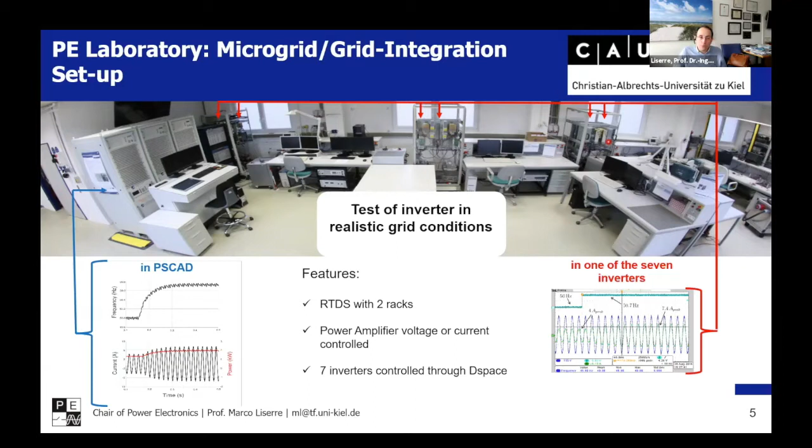Then this is another strong aspect, I'd say reliability, and as automotive field is very important, the aspect of reliability. What does it mean?

So this is a mechanical structure subjected to incredible variation of temperature, and basically you can have some crack, some failure because of this temperature variation. It's very similar to what happens in a building that is under variable temperature - the mechanical structure gets subjected to this stress. In the power module, it happens exactly the same.

Already in Aalborg I was developing a lot in this field, and I'm doing that in Kiel now. We measure with special devices the temperature of the semiconductor and capacitor, and we can see it in operation. We can take, for example, an inverter from electric vehicles connected to a machine - I'll show later a very nice setup we are building that is exactly that case - and you can see the temperature at different points and the kind of expectation in terms of lifetime this system has.

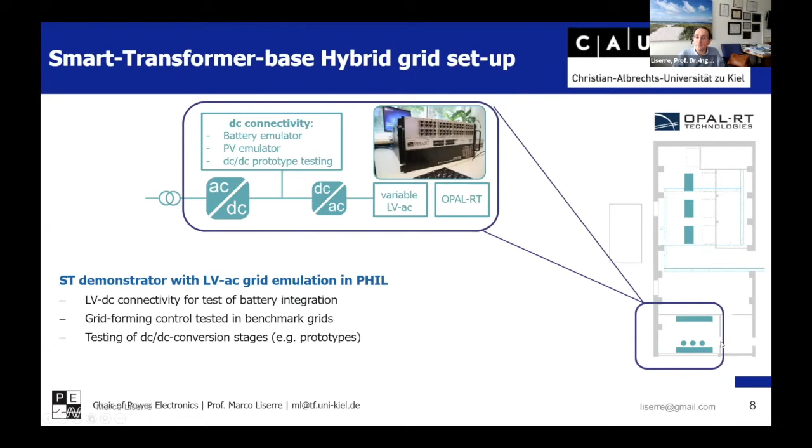This is another part of our building. And nearby there is, and will be connected to this, a brand new laboratory, a medium voltage laboratory, used to test large power converters with high power, medium voltage. And this is a very hot topic when it comes, for example, to charging stations.

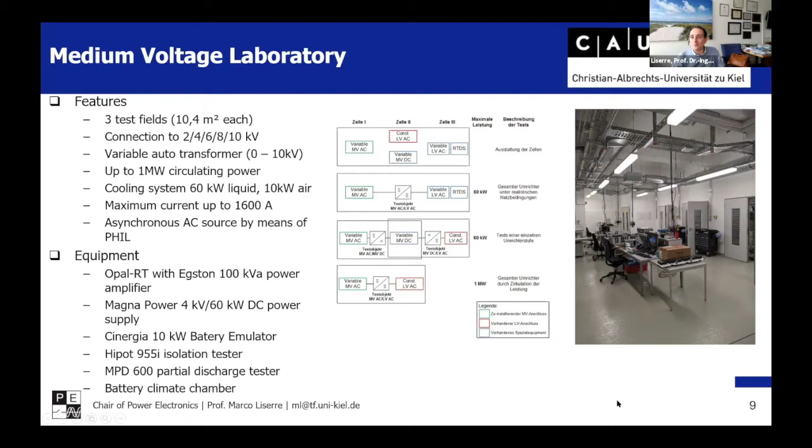So if you want to test a charging station, let's say this Tesla supercharger, you have a megawatt power range, and you need the laboratory to test that, and that's what we have here. It took 5 years to build this laboratory - it was quite complex to get it. Now it's in operation, and not only in operation, we have some prototypes from companies.

So in cell one there's a large modular converter which we connected directly to a 10 kilovolt network, built by some students in cooperation with ABB in a project. In the middle, actually something that has not to do with medium voltage but you have high current - with Danfoss Silicon Power, which in the region is actually producing power modules for semiconductor, and it is actually in the automotive field.

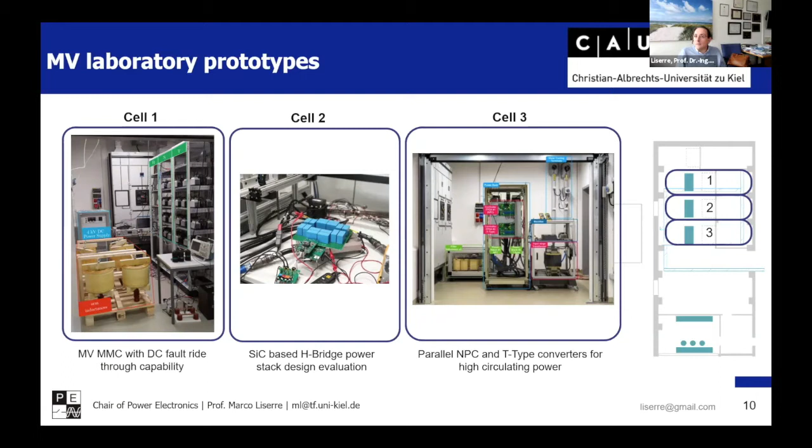And then in the third cell we have a multi-level converter, which circulates something like 500 amperes. So it's quite a large system. All 3 cells are in operation at the moment.

And then we have started this laboratory. We have got funded, and now we are buying equipment and building also competencies there, focusing on batteries for the smart grid and also electromobility.

The nice thing is that we have very good knowledge of battery technology, because here in Kiel we have a very strong Institute of Material Science in the Faculty of Engineering. They are nearby us, we are closely cooperating, and they know very well about the chemical properties and the material properties. So we will focus on this.

For teaching, I think you have all the information already, also from the first presentation which Professor Moira made—we have summer and winter terms. In summer, some of you will already come. It's the design of power electronic converters, mostly power converter topology and modulation. In winter, we have modeling and control of power electronics.

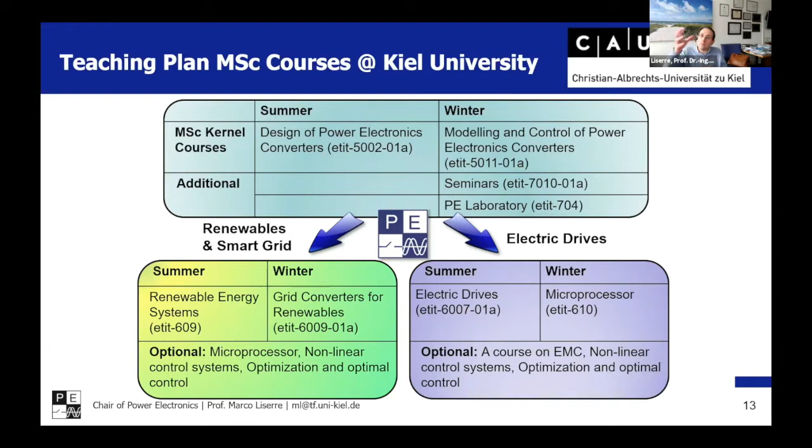And in winter we have grid converters for renewables, mostly power converters connected to the grid, or connected, for example, battery to the grid. So yeah, that's for you.

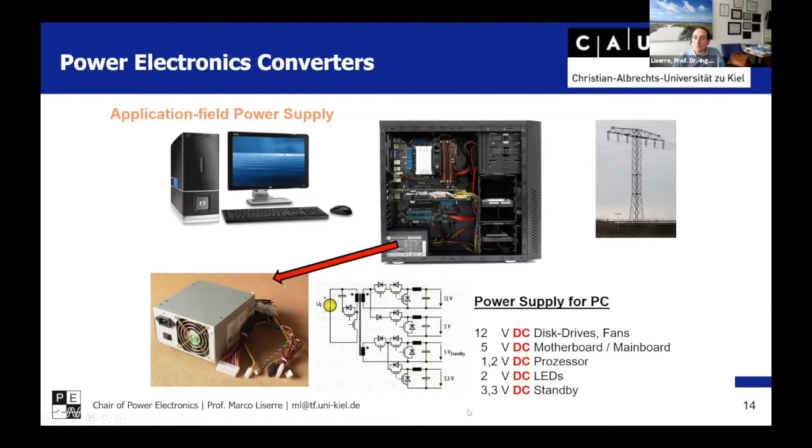So let's look at what power electronics is in general, with the example of a computer which needs a power supply at different voltages, and then you have to connect to the electric grid. Basically, power electronics spans from 1 watt to 1 gigawatt.

So there's also high potential in saving energy when you use power electronics in applications where it's not yet used. Power electronics is spreading into a lot of applications.

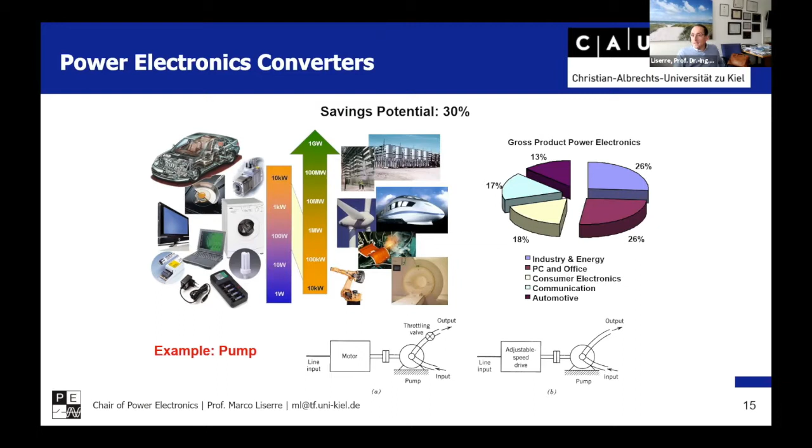In the automotive field, don't think only of the main engine, the electrical machine which allows the car to run, but also think of a lot of other smaller systems which need actuators in terms of electrical machines, and then they have power electronics. The power electronics can increase the controllability and also increase the efficiency compared to using some mechanical systems. That is basically the main motivation.

Another application where we are also present is wind. Of course you have mechanical energy, then a generator, and then power electronics to control the generator and connect to the electric grid.

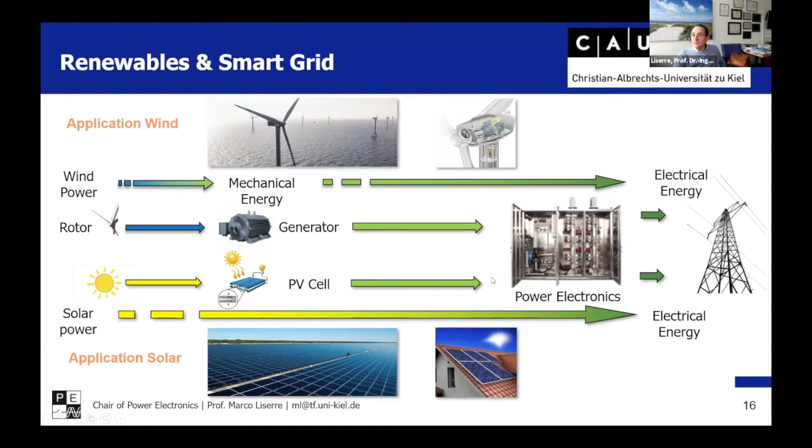And photovoltaics—of course you have DC voltage, and then you need power electronics to connect to the electrical grid. But you can also go, for example, to high voltage DC when you have to transmit a high amount of power. That is basically also part of our scope of interest, because we are very active in power electronics for the electric grid.

We are in strategic programs in Germany, which are very long-term initiatives about that. And of course, e-mobility—not only, as I say, power electronics for the main machine, but also active suspension.

We have done some work also in cooperation with some colleagues in Italy. Wireless power transfer—we also do that, to charge the car, which could be static or dynamic, so when the car is moving.

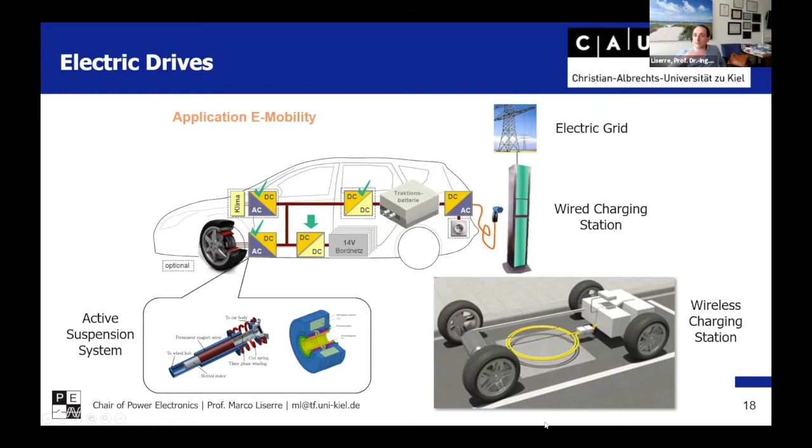Here you can have a look at the projects, to see a bit more in depth what we are doing. These are all the projects that we have in the energy system, in the field of electric vehicles.

Just an example, the KielFlex project is a project of the city of Kiel, where we consider, for example, the mobility of ships, buses, and cars, and then the charging station, the impact on the electric grid, and so on.

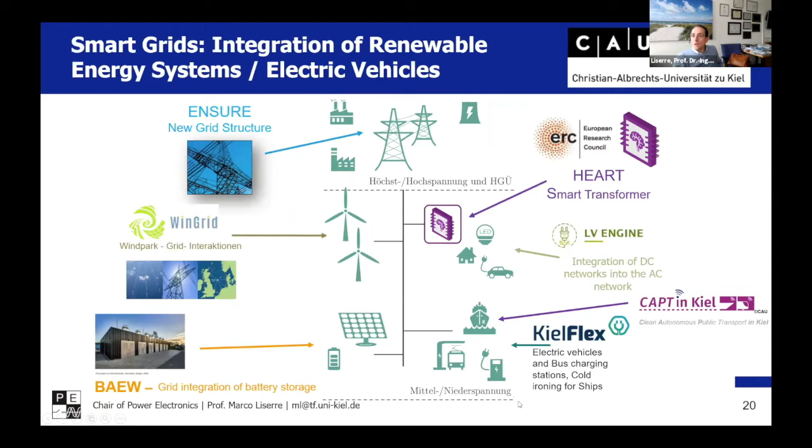We have also a lot of projects specifically focused on electromobility, also with local companies, where we have seen, for example, a nice presentation from the company in Hamburg, Neuville. They make this small trailer, a very revolutionary idea, and we are cooperating with them on the electronics of this small trailer. But also with other companies, local, regional, and also in Germany in general.

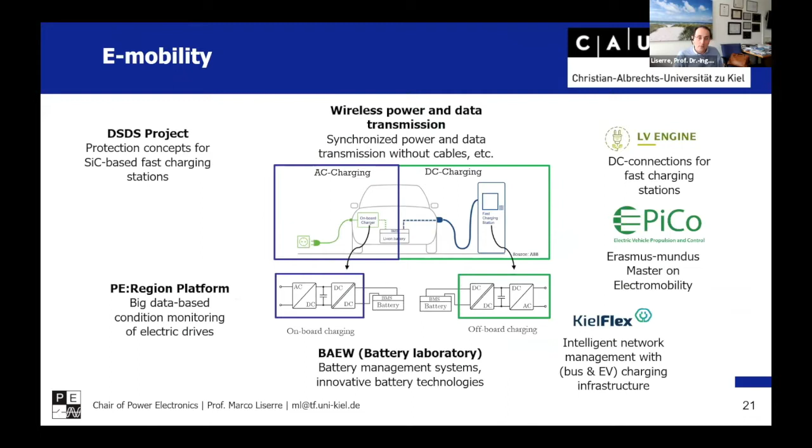That is what I talk about with projects, then we go into some results. For example, I told about hardware in the loop and power hardware in the loop. These approaches test some hardware, some power converter, some control. That was the project I was referring to previously.

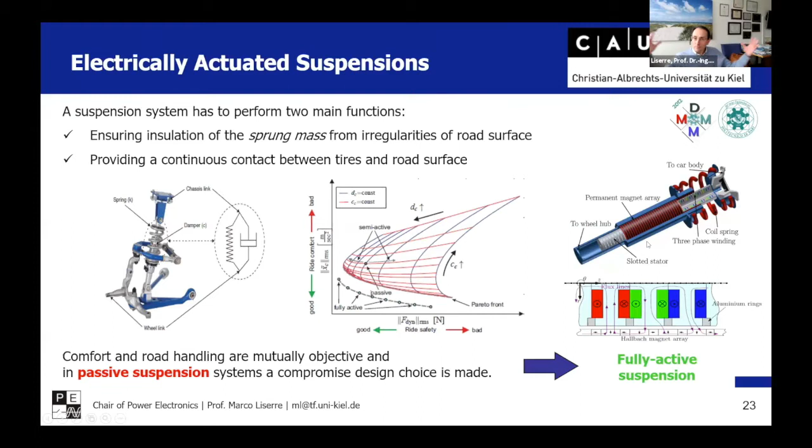We have modeled an active suspension, which is basically used for damping the oscillation and vibration of the machine, and you can also use it to recover some energy. With colleagues from the Department of Mechanical Engineering in Italy, who we are still cooperating with, and other students, we made the full model of the entire chassis of the car.

At the bottom here, you see the road profile and the suspension. The rest of the vehicle is actually simulated in this supercomputer, and then there's a power amplifier which applies some signal to this inverter of Danfoss, controlled by dSPACE, to actually control this active suspension. We are cooperating with dSPACE, which is in Paderborn, not far from here.

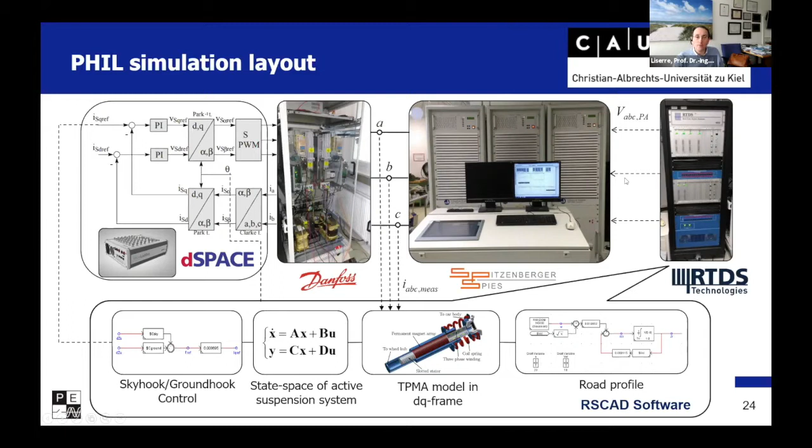We have done a similar study also for testing, for example, a smart transformer, again with part of the network simulated, and the power converter doing the smart transformer in the laboratory.

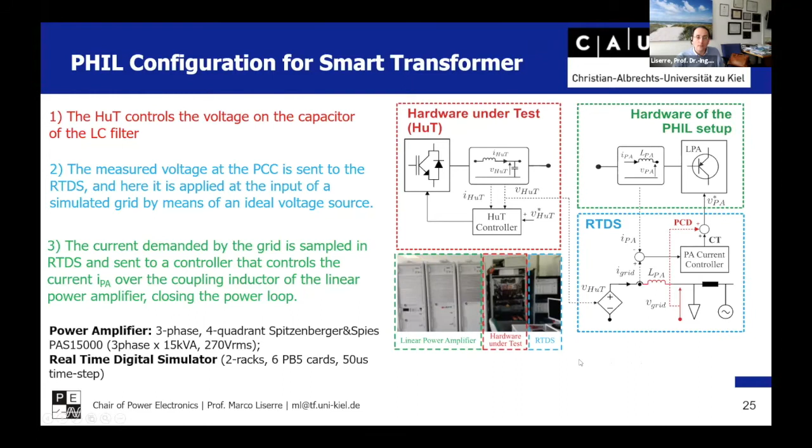Typically when part of the network is overloaded, you have to invest a lot of money to reinforce the line. If you use instead the smart transformer, you can control where the power is flowing. You can save money, and you can also save emissions, because using DC gives you a more efficient technology.

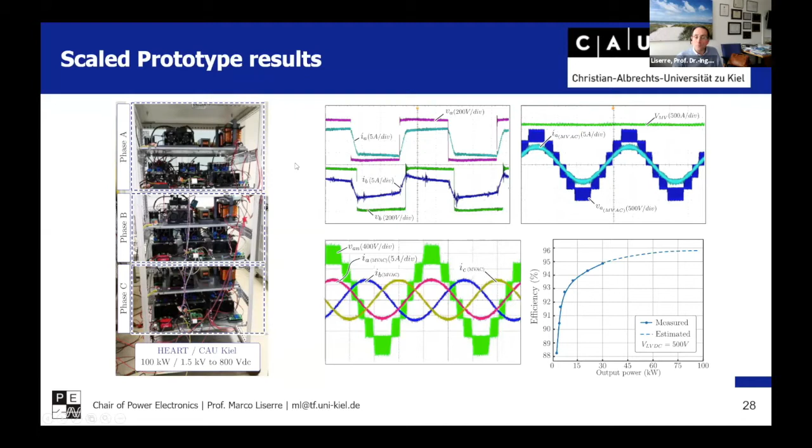We have also focused a lot on reliability, introducing this concept of power routing. You see on this side here, when you have a modular system with different cells managing the power, sometimes one of these cells gets a failure or should be replaced, gets maintenance, and then comes back into operation. At the end you have cells with different lifetimes, and you try to stress each cell differently depending on its strength.

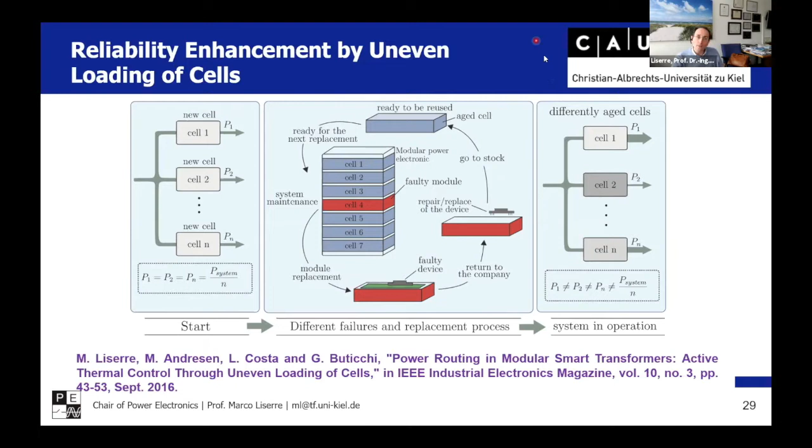If a cell has more remaining lifetime, you stress it more, and those that are a little weaker you stress less. This is the concept shown here with a simple 3-converter cell setup, connected in parallel, where the power balance becomes unbalanced because in some cases you want to increase the lifetime of a component with very low remaining lifetime. Cells 2 and 3, which have more remaining lifetime, can consume more of their lifetime.

These are concepts coming from industry, especially the automotive sector, which is developing control for the lifetime of components. So basically, you are not only controlling current, voltage, or speed of the machine, you are even controlling the lifetime of the components. Very advanced, and this came from industry about 30 years ago.

We also make studies considering the distribution of different cells, for example of a modular structure. In green, you see that if you don't do anything, the cells will fail between 19 and 25 years. Using our approaches, you get what you see in blue, giving a clearer expectation of when the cells are going to fail. You can basically postpone the 5% failure probability and make the window narrower, giving a better expectation of when to do maintenance.

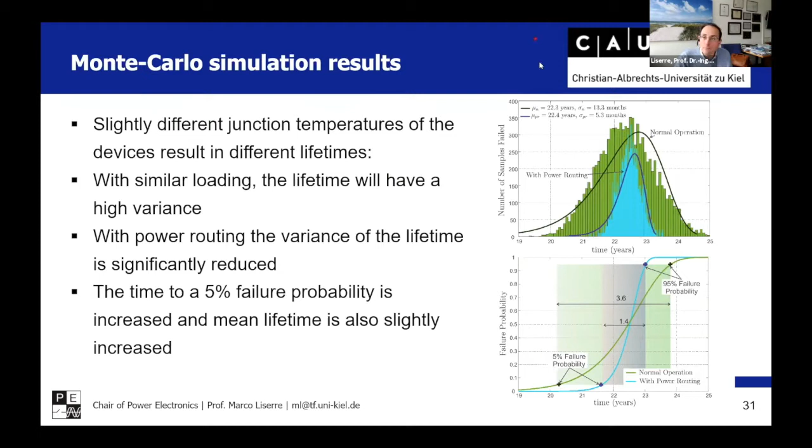This kind of concept is sometimes a bit outside our electrical engineering background, but especially for a multidisciplinary master's program like yours, I think it's something that can be interesting, because these are approaches that actually apply in industry.

Another example, this large system which was built to test impedance in the electric grid. Here there are these two containers - we build the power converter and the control, and then we put into the grid some signal to measure the impedance of the grid. You can do that, for example, also for batteries.

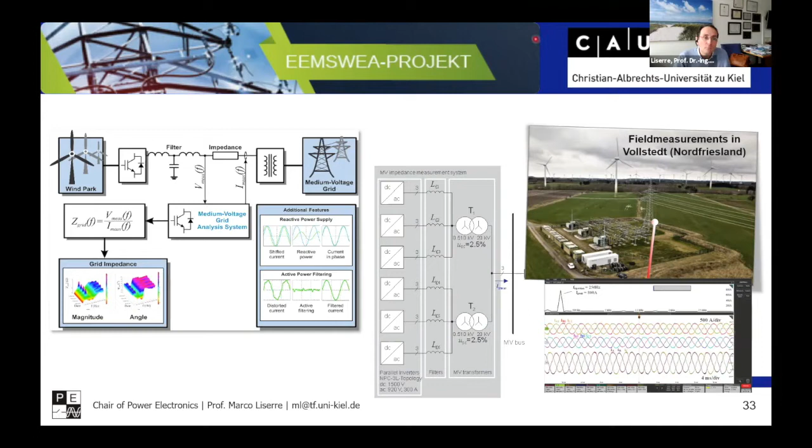In fact, we are also developing the same concept for batteries, or sometimes to characterize part of the powertrain of electric vehicles. We get some requests from companies active in this field. So it was a challenge, not only from the hardware point of view, you see it's quite a large system, but from the control point of view, you see a lot of oscillation, and you try to also dampen it.

Another example is this high-speed drive. High-speed drives are very often now used to also improve efficiency, because you can avoid having the gearbox, and they have a machine which is rotating at high frequency, which should be specially designed for that. For that reason, we are cooperating with this professor from the University of Flensburg, who is designing the high-speed machine for us. You can see here the high-speed machine was specially designed for that.

You see here, and we have used some special power electronics developed in cooperation with Danfoss Power Electronics here in the region, which are using also silicon carbide devices - it's a hybrid ANPC system.

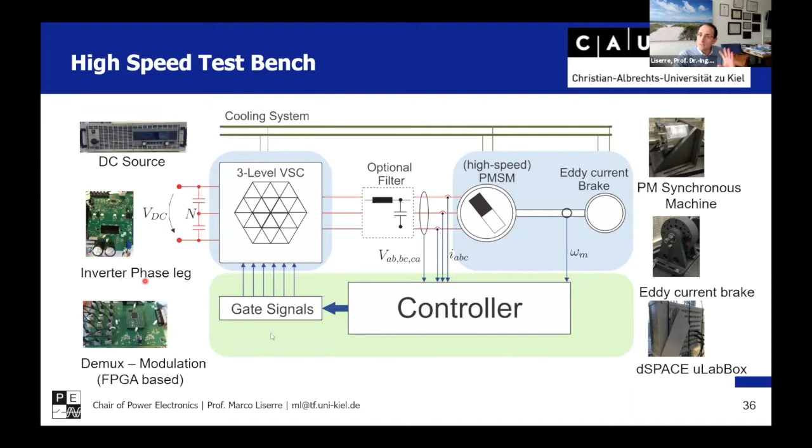You see here, this is the open module. This is something that we can only do because we have the cooperation of the manufacturer of power modules, who actually produce some power modules without the gel. And you see some of the devices, they are basically SiC MOSFETs, some other classical IGBTs.

Then with this module without the gel, we can see the temperature with the infrared camera. So we are going to look very clearly at the temperature into the machine with sensors, into the power module, and then you can do several things. You can optimize the design, you can focus on the control and make the control also take into account the lifetime of the system.

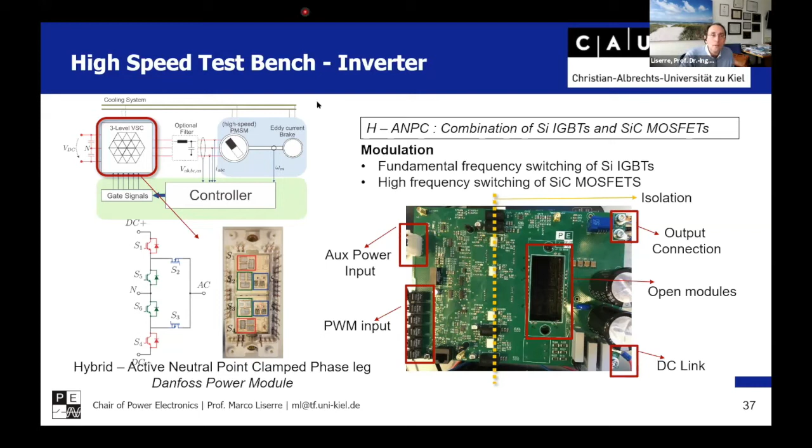So this is also a very nice application in the automotive field. And here you see we also make some estimation of the lifetime, considering different kinds of modulation, for example, ways of driving the devices. So we really have hardware, modeling, control, probability, all coming together. It's very multidisciplinary. For that reason, in the team, we have these three sub-teams with people focusing more on hardware, more on control, and more on application, and they cooperate among them.

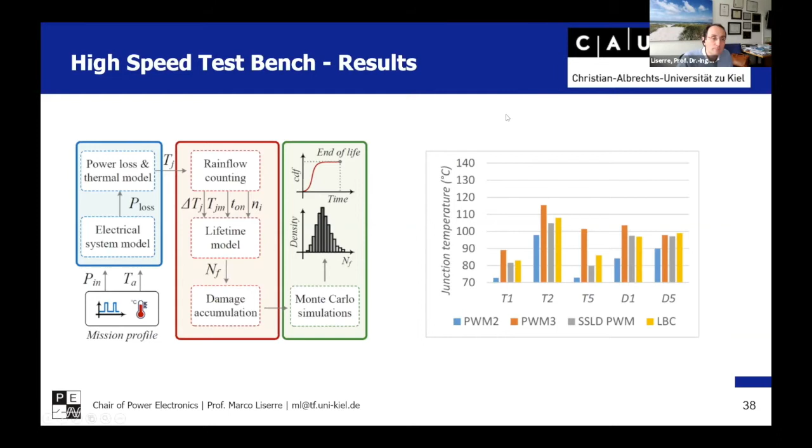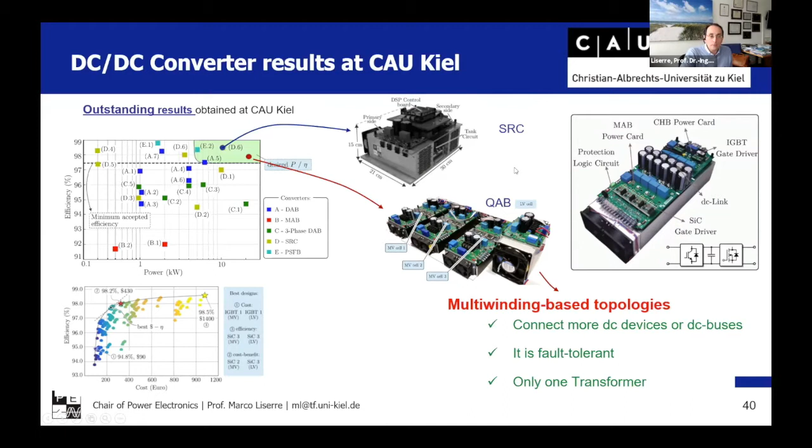This is the DC-DC converter, which was specifically developed to be fault tolerant - also an application in automotive cases. This is shown here in the laboratory under test. For example, we make one cell fail, and then the system continues operating. So basically the system should continue to operate even in case of failure in a lot of applications - electric grid, but also automotive - there is a lot of these requirements.

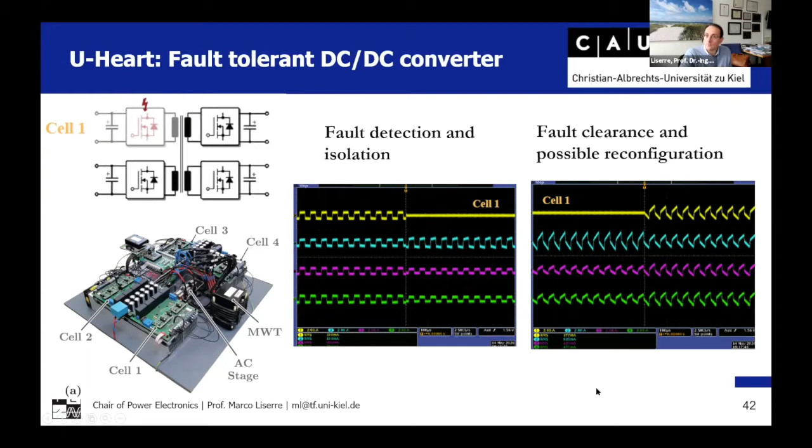And that's it. I would be happy to answer your questions. I think I haven't used maybe a little bit less than half an hour, but I think it's very important to have some interaction among us.

Okay, yes, thank you Marco for this nice talk - very, very interesting in the field of power electronics, and you have really many applications and many collaborations with academic institutions and with companies and industries. So it's very, very important. Professor, I have some questions.

Hi, thank you so much for the presentation. It's so interesting that you have many experiences and many projects in the domain of power electronics, and I'm really proud that I have the chance to work with you next year in my third semester at Kiel University. Actually, it's interesting for me to know more about the platforms, softwares, or applications you mainly use in your laboratories, because you mentioned PSpice and of course MATLAB, and I just want to know about other applications or platforms that you mainly use in your laboratories.

And another thing is my question - we mainly focus on automobiles, but it's interesting for me, what kind of technologies or progress we've had in the domain of airplanes. It's really interesting for me - have you ever worked on a project related to airplanes or not?

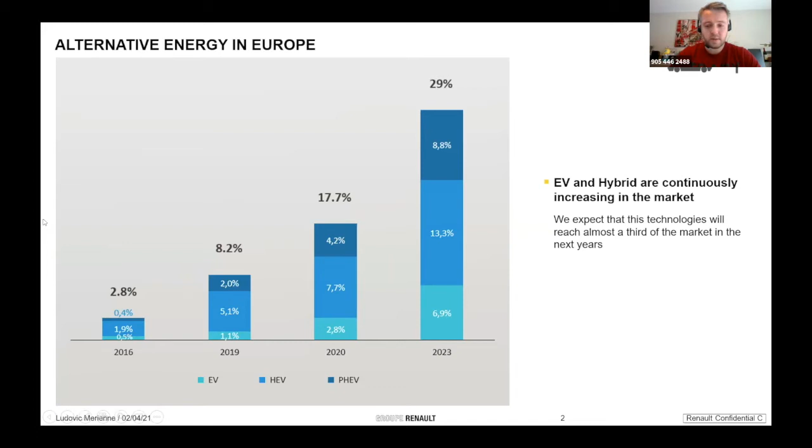We expect that in the next year, maybe 5 or maximum 10 years, diesel will disappear and will be replaced by those technologies. Diesel will only remain for big vehicles, trucks mainly, and not anything else.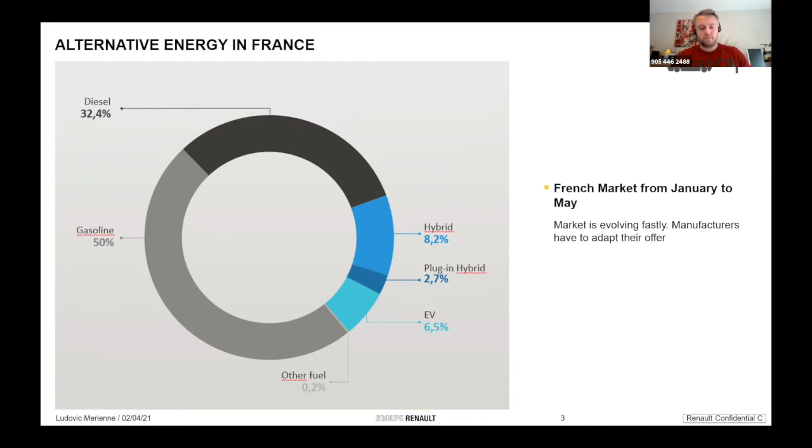So today I will speak mainly about E-Tech technology, which is a new hybrid technology sold by Renault. We started last summer to sell these cars, so it's quite new. I will also touch on some gearbox control issues it faces during this gearbox development, and I will introduce how we manage energy optimization inside the software, so how we reduce consumption in the software, and how we control it.

So to introduce the E-Tech technology, today we sell 3 different cars. Maybe you know Clio, which is a full HEV, so only hybrid, and Captur and Megane, which today we sell as plug-in hybrid. So hybrid for the smallest car and plug-in hybrid for the biggest car. I will explain why it makes sense.

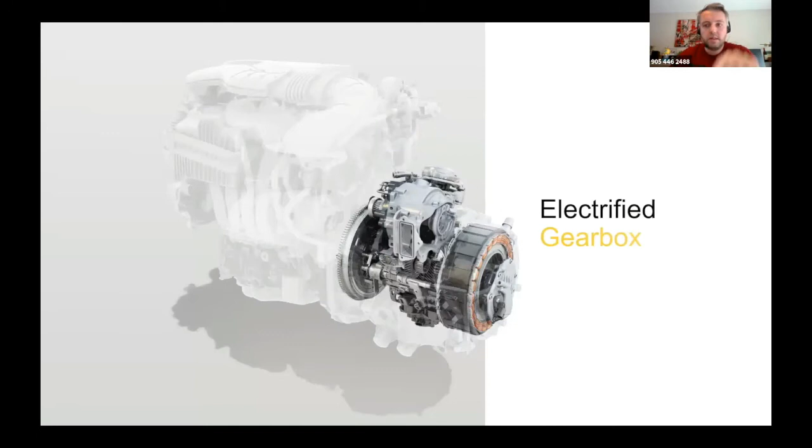So E-Tech is an electrified gearbox inside which we have, as you can see here, a gearbox which is the same technology as Formula One, a gearbox without any clutch and without any speed synchronizer. It is only dog clutch, meaning it's only neutral or on-off gear.

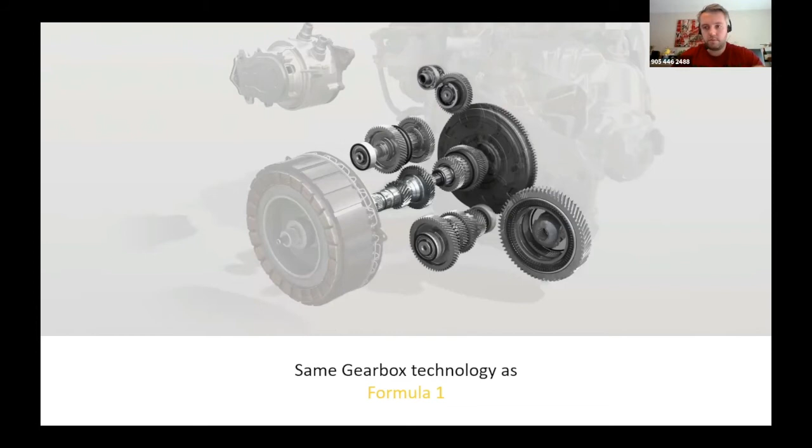It means that if we want to engage, to use some gear, we have to first synchronize speed, so that there is not too big a gap of speed in and out of the gearbox. In this gearbox we have a main e-motor, which is used to start the vehicle. As there isn't any clutch, we cannot start the vehicle with the ICE, the combustion engine. The only way to start the vehicle is with the e-motor, because it's the only motor that can produce torque at 0 speed, 0 RPM.

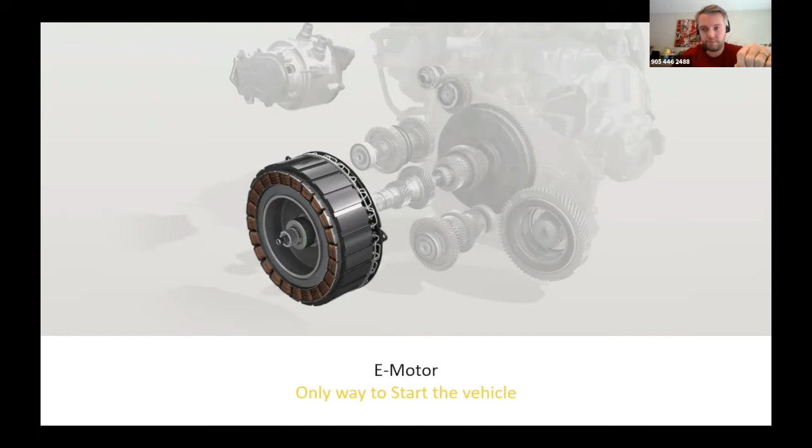And we have a smaller electric motor, which is a high voltage starter generator. If I want to compare the power, the main e-motor is 50 kilowatt power, and the smaller is 25. So it's smaller, but it's still big, as we could drive the vehicle with the small e-motor to maybe 80 kilometers per hour easily. So smaller, but still it's a big e-motor.

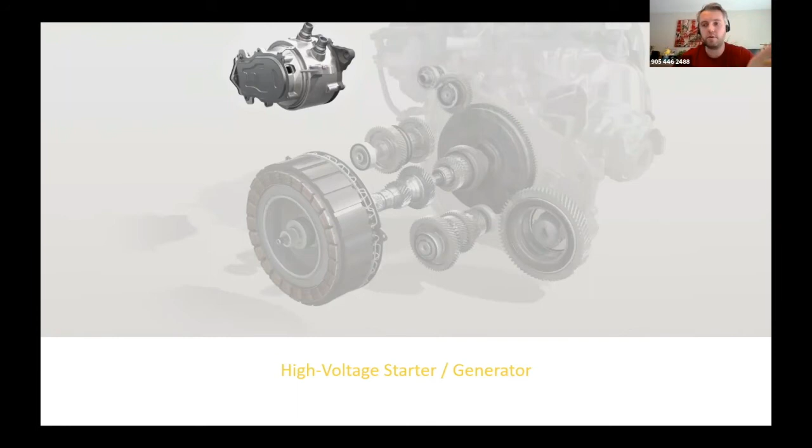And the engine, the combustion engine, is a simple atmospheric and straight-four engine, which has been mainly designed to reduce CO2 emissions, to reduce consumption.

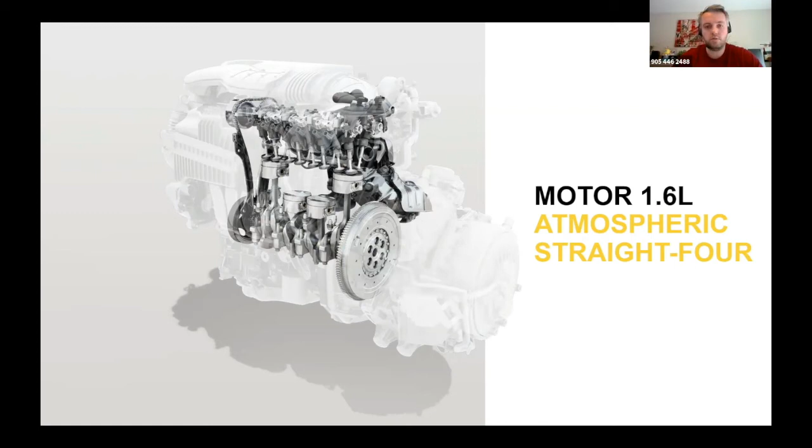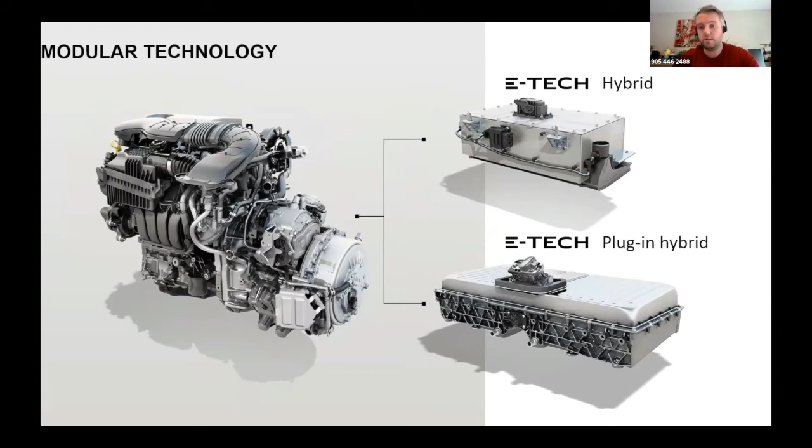And what is interesting with this technology is that for full hybrid or plug-in hybrid, it is exactly the same e-motor, gearbox, and combustion engine. The only difference is the battery, and for plug-in, the fact that there is a charger.

For the full hybrid vehicle, it is a small battery, 1.2 kilowatt hour energy. And I recall about 9.8 kilowatt hour for the PHEV battery. And there are two levels of power, because with the HEV battery the voltage is quite lower. So even if it is the same e-motor, because of the lower voltage, we cannot reach the same power with the e-motor. You understand?

Because the plug-in hybrid battery delivers on average 350 volts, whereas the HEV battery is nearer to 250 volts. So because of this voltage gap, we lose some power, and that's why for HEV, with the complete gearbox, engine, and e-motor, we have 105 kilowatt power, and the same system with the bigger battery can deliver 120 kilowatt.

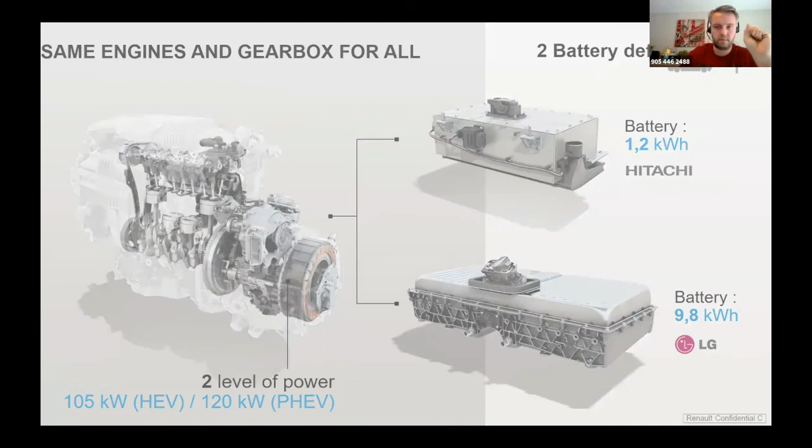So the full hybrid model here, just to show how it is. The battery is located in the back of the car and the motor is in the front. Here on Clio, we homologate at 96 grams of CO2 per kilometer.

To be honest, we had the objective to reach 90 because of government incentives, I think. Yes, you're right. And we will progress in the next year with the same technology. I think we will reach our first objective. So here, yes, it is how it is in the car.

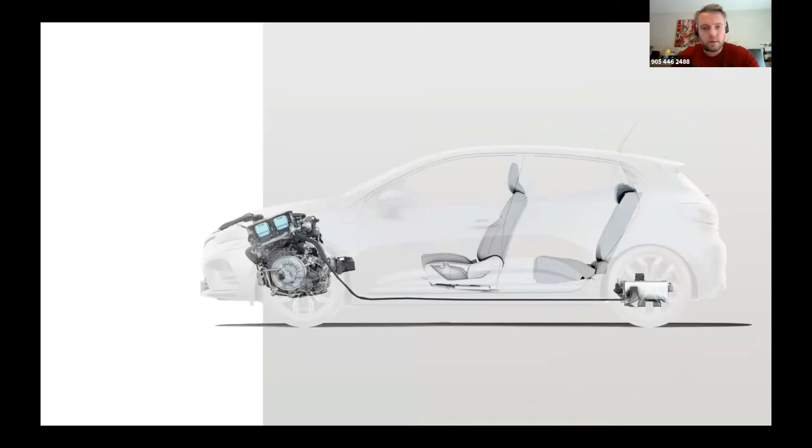And the plug-in version, in the front of the car, it is the same gearbox, same motor. But in the back of the car, the battery is bigger and there is a charger with a trap, an access trap for the charger. So here, the plug-in hybrid will homologate with 32 grams CO2 per kilometer,

which is a number that doesn't mean anything. In fact, it is just a formula we applied to tell this number, because a plug-in hybrid vehicle works in two main modes: EV if the battery is full, or when the battery still has energy, and full hybrid when the battery is almost empty.

So it means that this plug-in hybrid, when the battery is almost empty, the system will work as the HEV version on Clio. The only difference is that the voltage of the battery remains higher, so you still have the 120 kilowatt power, but the emission of CO2 if the battery is empty will be near 102 grams CO2 per kilometer.

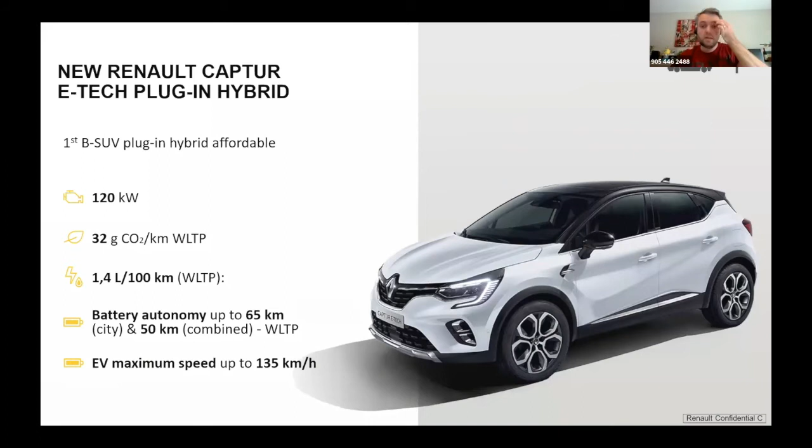Yes. So regarding gearbox, here it is, in fact, mechanically speaking, the gearbox, as I said, which is used in Formula One, is the simplest gearbox we have now. It's only controlled by dog clutch, which means, as I said, that there is only neutral and on-off with any gears.

And here in the gearbox, we have, in fact, 2 gearboxes, one for the ICE line because the high voltage starter generator is always linked to the ICE, so it is one block. And for this block, we have 4 different gears. And for the main e-motor line, we have 2 gears, which means that we can choose independently the gear on the ICE line and the EM line,

which allows us to give a feeling of DCT without any gap of torque when we change a gear, because as it is plotted here, when the vehicle is driven by the ICE and we want to change the gear, we will engage, if it was not already the case, a gear on the EM line, so that when we change a gear, when we have to open the gear on the ICE line, we replace the torque which was given by the ICE by the torque on the EM line.

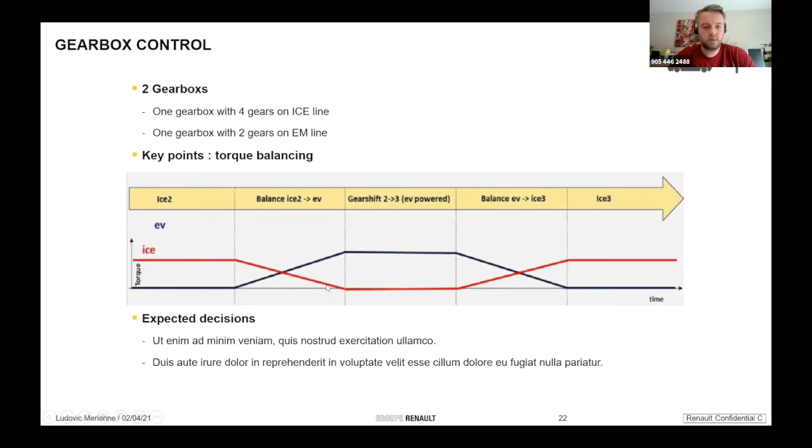I will go more deeply in this case, because as I said, there isn't any clutch in the gearbox. So if we want to start the vehicle, we can only use the main e-motor.

This creates some difficulties because mainly when the battery is very cold, it cannot deliver a lot of power. So it means the minimum speed of the ICE in which we can use it is near 1,200 RPM. It means that we cannot use the ICE gear unless the speed of the vehicle allows us to engage a gear in which the speed of the ICE will be higher than this 1,200 RPM. It means that with how we design the gear, we cannot use ICE gear unless we are above maybe 18 km per hour.

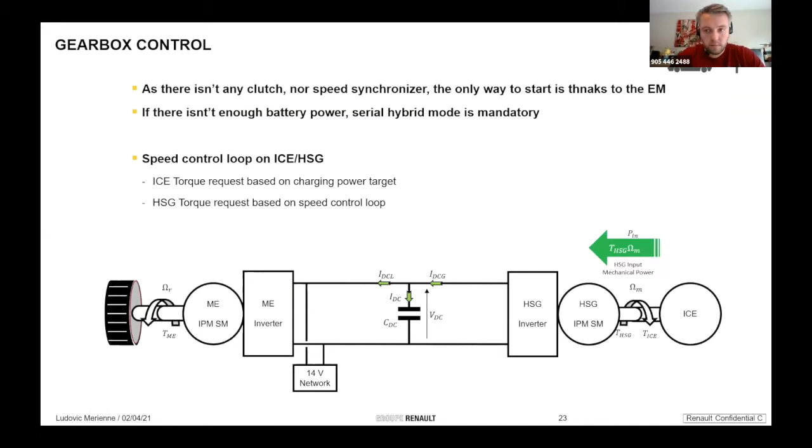So how do we design the control for this? In fact, we have the ICE line, which is standalone, and we have two things to control: the speed of the starter of the high voltage starter generator, which I'll call HSG, the speed of this block, and the electrical power that it will create.

So we choose to control the power that will be created by this block using the torque request on the engine of the ICE. And we choose to make the speed loop using the HSG. Why do we do that? Because the charging loop - as we have a battery, we still have a battery - it is not the loop which needs the more dynamic response.

And our actuator, which is the slower actuator, is the ICE. A combustion engine is really slower than an electrical machine. If I want to give you an example: for a combustion engine, if it is already running, but if you want to change the torque request, it will take at least 200 milliseconds to change and to realize the new torque request we send to it. Whereas the HSG, if we change a torque request, it will only take 10 milliseconds to adjust the torque which is realized. So the electrical part is really fast compared to the combustion part.

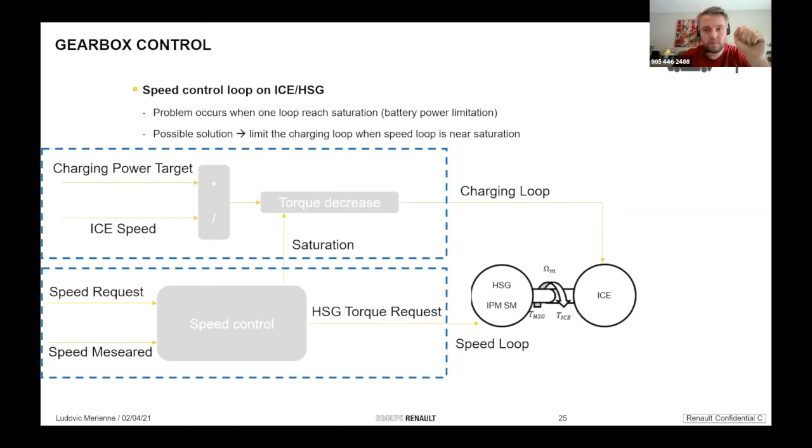So here it is the thesis on which Sébastien Roquet worked in Centrale Nantes. He worked on this problem: how can we manage such a serial hybrid control in the case that we don't have the battery, in the case we only have a small capacitor to only filter the energy. So it creates more constraints, but it is a really interesting topic. I won't detail it because I don't have time, but you can contact Sébastien Roquet at Centrale Nantes if you want more detail.

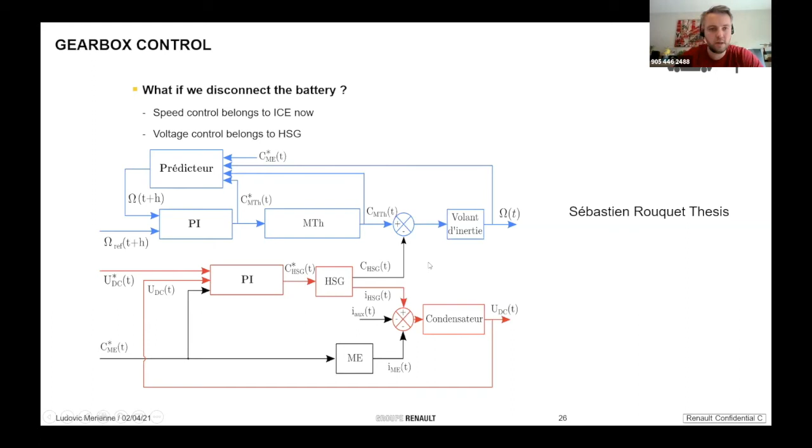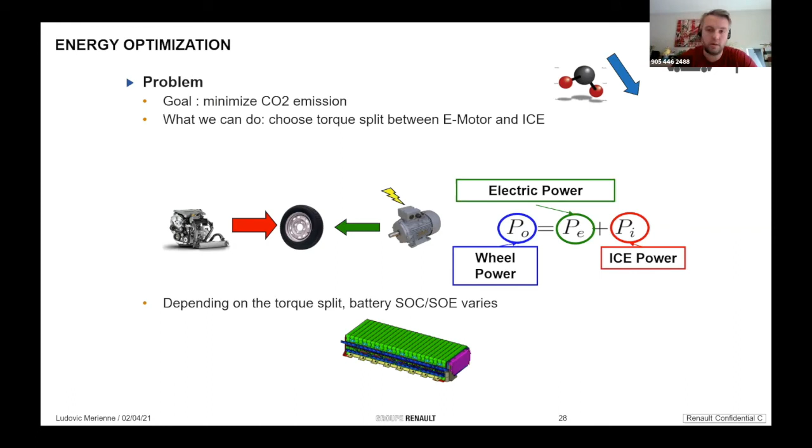At last, I wanted to speak about energy optimization and consumption minimization strategy. So when we are in a hybrid vehicle, our goal is to minimize CO2 emission. As we have an electrical source of power and an ICE source of power, what we can do is choose how we balance the torque between the ICE power and the e-motor. The constraint is that the driver, when he pushes the pedal, we convert this information into a wheel power the driver wants. This P0 is a constraint, and if we realize this P0, we can choose how we split it between the ICE and the EM.

How do we do it? At each time we will calculate what we call an equivalent consumption, using this formula. We use what we call the equivalence factor. This factor converts electrical power into consumption and CO2 emission, so that when we test the different ways to realize the driver wheel power, we can compare which combination of torque on ICE and EM will produce the least emission. This equivalence factor is also used as a way to control the state of charge of the battery.

How is it done? When the battery is fully loaded, this factor will be very low. It means that if the driver wants 50 kilowatts, there are two cases: 50 kilowatts done by ICE or 50 kilowatts done by EM. 50 kilowatts by ICE would have some consumption; if this factor is very low, 50 kilowatts from the battery will be almost free. So when this equivalence factor is low, it means we will drive almost only as an EV. Then when the state of charge of the battery goes too low, this equivalence factor increases, meaning we will use more and more ICE power, and if this factor is very big it will lead to using even more ICE power than the driver asked, just to charge the battery.

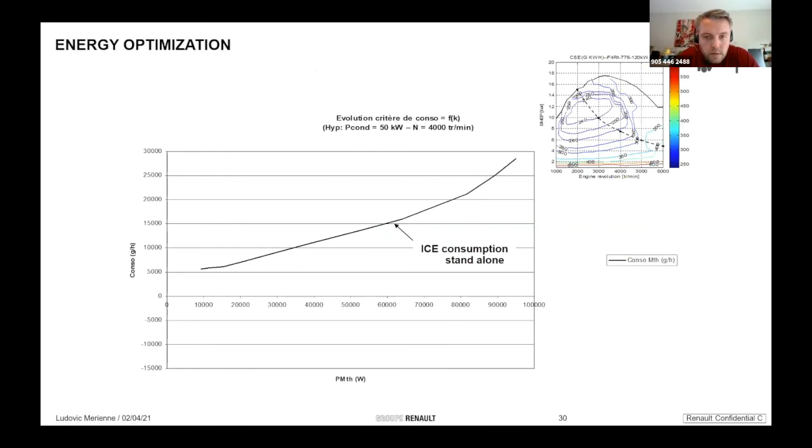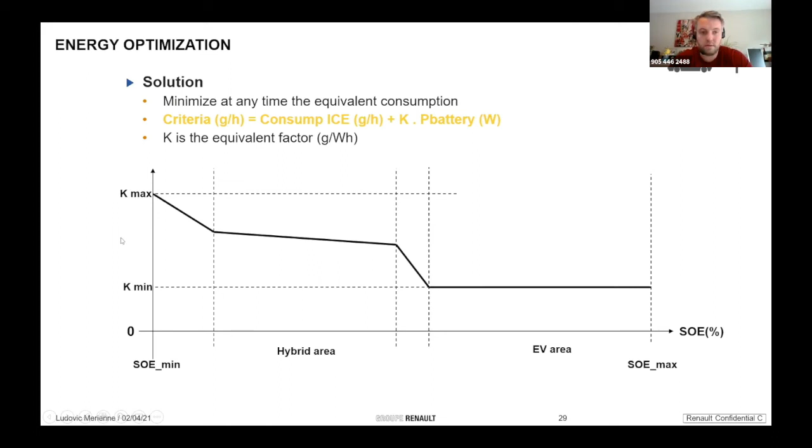As shown here, on the left part of the graph it is the hybrid area, and on the right part it will be the EV area. So this is how we control the state of charge of the battery inside the vehicle.

So this energy optimization is only a way to optimize, at one moment, one driver wheel power request, how we respect this demand while discharging or charging the battery. Here I plotted it only for one gear, but this calculation can be done for all the available gears at the same time, and we can find the minimum for one gear, check the minimum in another gear, and choose to change gear based on which gear has the minimum energy cost.

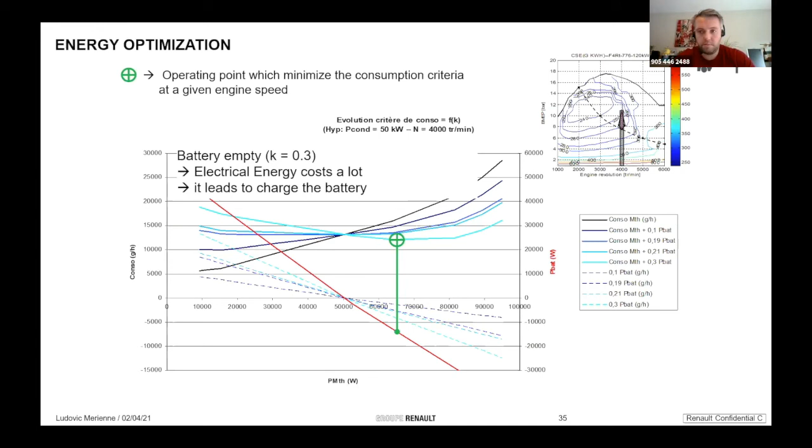And with some other constraints, this is mainly how we choose the gear with our technology. But still, this is only to optimize one moment. If we want to optimize on a complete journey,

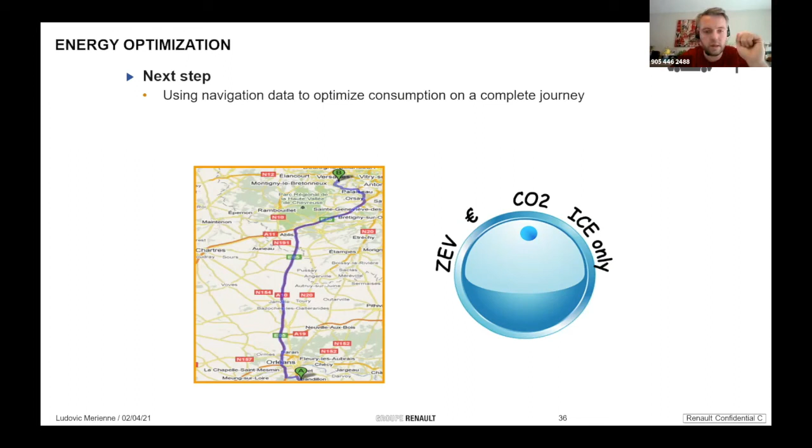the only way is to know the journey. So we could use our GPS data to know the road the driver will take and modify our equivalence factor data to better use the electrical energy all along the journey.

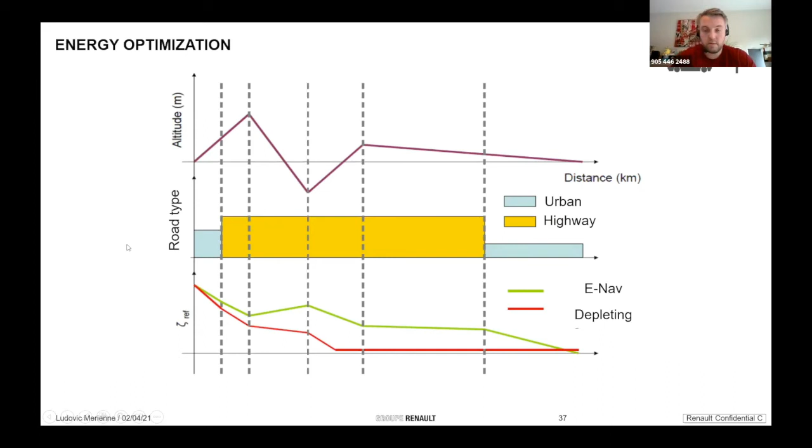Okay, so if I summarize these points, the idea of the first part is how we minimize consumption, but without knowing the journey. Just at this moment, what the driver wants, what is the state of charge of the battery, how we do it.

And what I show you is not only used by Renault, but it is widely used among car manufacturers. I know Renault, we worked with Nissan, so they do the same, obviously. And I know that some German car manufacturers use this ECMS strategy also to control the SOC of their battery, Mercedes especially.